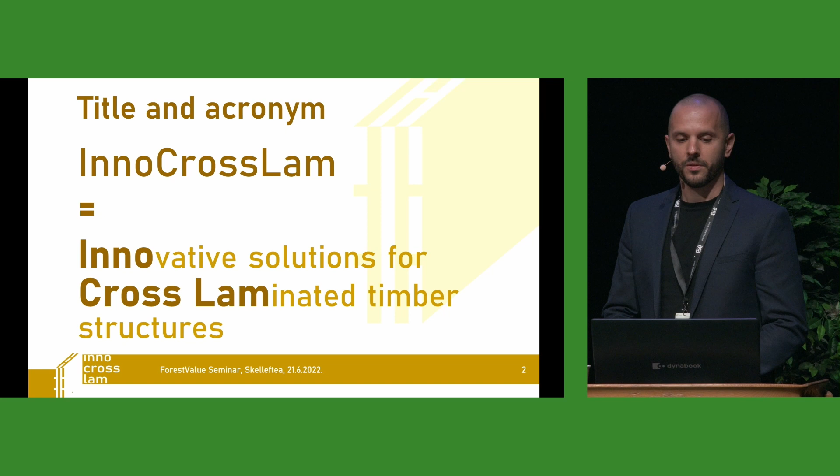As Mika said, we have an acronym, InnoCrossLam, which stands for Innovative Solutions for Cross-Laminated Timber Structures. I will just repeat our main aims: to further increase the competitiveness of CLT as a versatile engineering product by dealing with demanding design situations which are not covered by design guidelines of today or in the near future.

In parallel, we were developing a multifunctional use of CLT as an integrated part of heating and ventilation systems. So who we are?

We were five full project partners: us from Slovenia as the leading partner, then Lund University in Sweden, Vienna University of Technology in Austria, Technical University of Munich in Germany, and University of Navarra in Spain.

In addition to research partners, we have several associated partners representing industry, architects, and civil engineers. At this point, I would really like to thank and acknowledge all my co-workers.

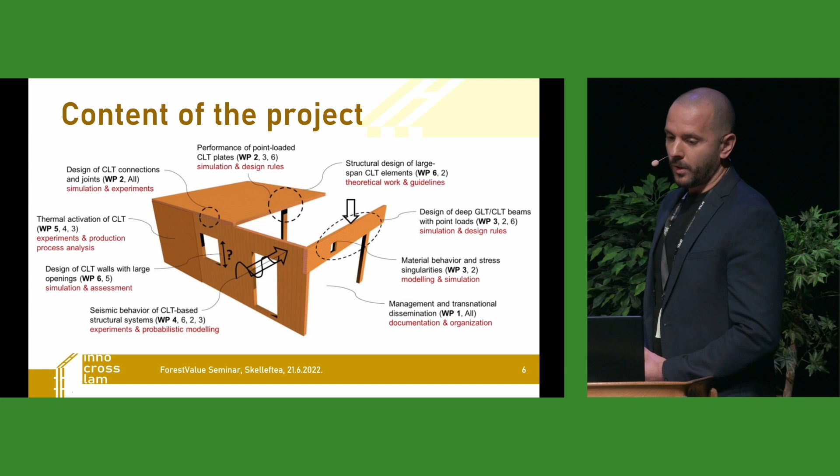And with this we were also focusing on the material behavior and stress singularities.

So I invited on stage three professors to discuss the motivation on why we applied for our project.

First it's Professor Eric Serrano from Lund University. He's the head of the Department of Construction Sciences, and he was also one of the initiators of the project.

Then Professor Philipp Dietsch from Karlsruhe Institute of Technology. He was leading a cost action from research to practice of timber structures.

And then Professor Stefan Winter from Technical University of Munich. He is the chairman of the new Eurocode 5, and was the one that directed our research, which then was helpful to be more related to practice.

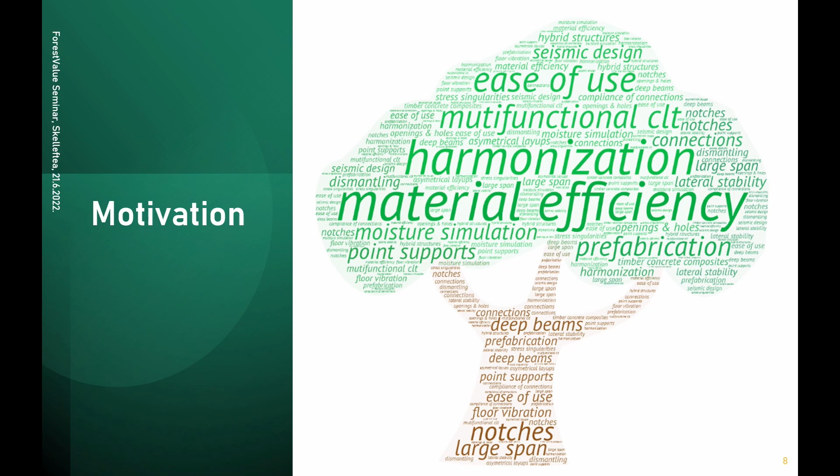Okay, so we covered many of the keywords from the tree, but still maybe the last question would cover even more. So our project received a lot of support from the industry and practice. And what is, in your opinion, the reason that we received this large support?

I see, going back or pointing back again to what has already been said, I think the 10, 15 or 20% of the design situations, I think there is a need, somehow a frustration perhaps, for the everyday practicing engineer. I would also like to highlight the ambition we had in starting with this and trying to follow through, which has of course been difficult with the pandemic situation, to involve also architects in our project to help us define or find the everyday challenges not being able to easily solve today. I think this has meant that they've felt really involved and able to contribute.

Exactly, and the main reason is that 20% of missing issues are consuming 80% of the time in the design of a project. And just as a final addition, this idea of thermally activating CLT elements, industry said, hey, cool idea, but what about this? And to answer this what about, I think they were interested in us trying to do so.

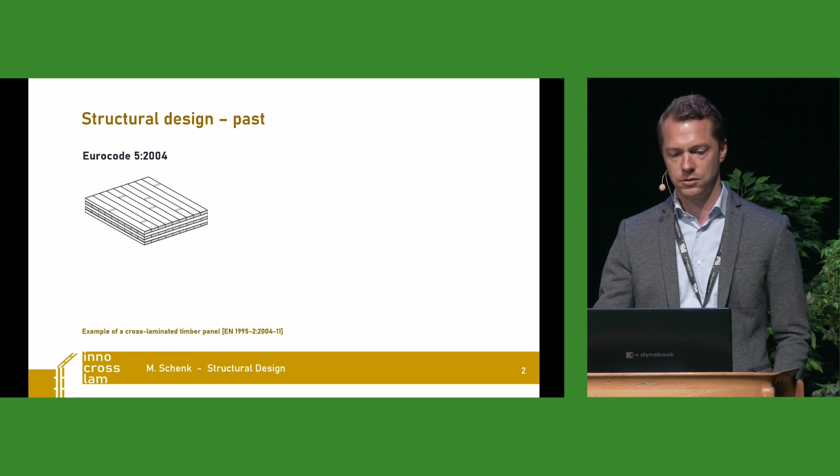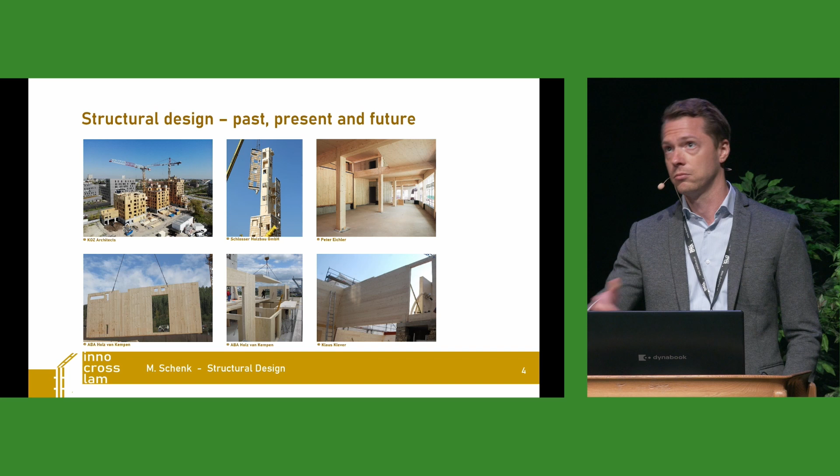The background is very clear: the relatively young material CLT barely made its way into the European design standards, the Eurocode first generation, but it will get implemented further into the second generation. For us, the question remained, is this everything we see every day on site, or as we saw the last days within this building?

To investigate that further, we started with a digital questionnaire. We distributed it in 2020 to a target group of designers, constructors, and researchers. We distributed 48 questions, and at the cutoff date we received 141 replies from participants from more than 20 countries. We received information about their experience on CLT construction, general design methods, CLT finite element software, and complex design situations like joints and connections or seismic design.

As we have seen, Eurocode 5 barely mentions CLT, and that can be seen here from this slide as well. On the left-hand side you see all the literature indicated during this survey, and in blue you see highlighted official standard documentations. The others are mainly research papers or CLT handbooks.

On the right-hand side, the picture gets more homogeneous when we look at the documentation of product parameters. Highlighted in blue you can see EN 16351, the product standard, or ETAs based on an EAD disseminated by EOTA.

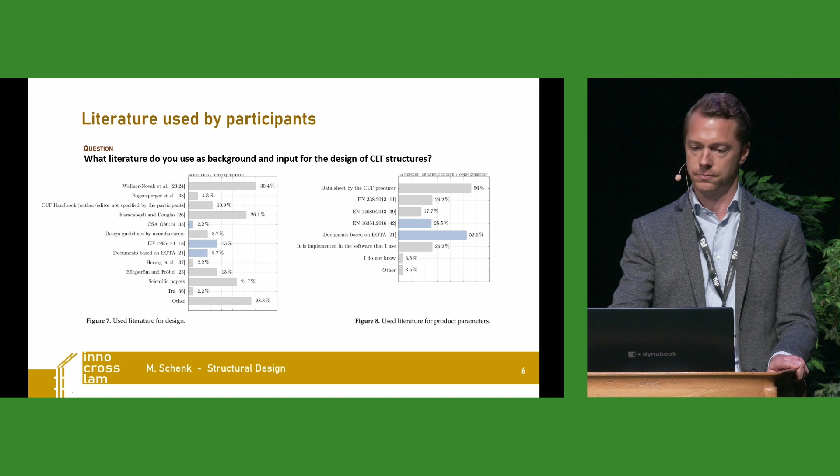But when asking our engineers, do you verify the output of your software? 20% said no. Nowadays that's quite fine, right? Our FE software is really good, and that's fine for us. No, of course not. This is a high risk of failure, as you use your autocorrect mode every day for writing messages with mobile phones, although the FE software could lead us wrong.

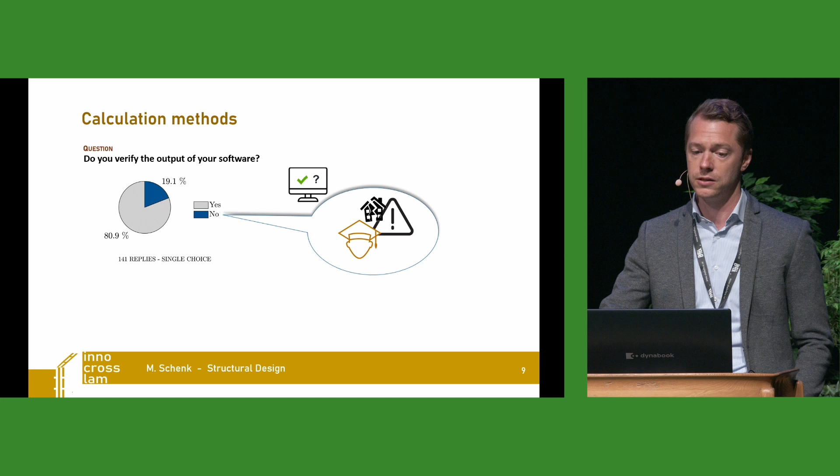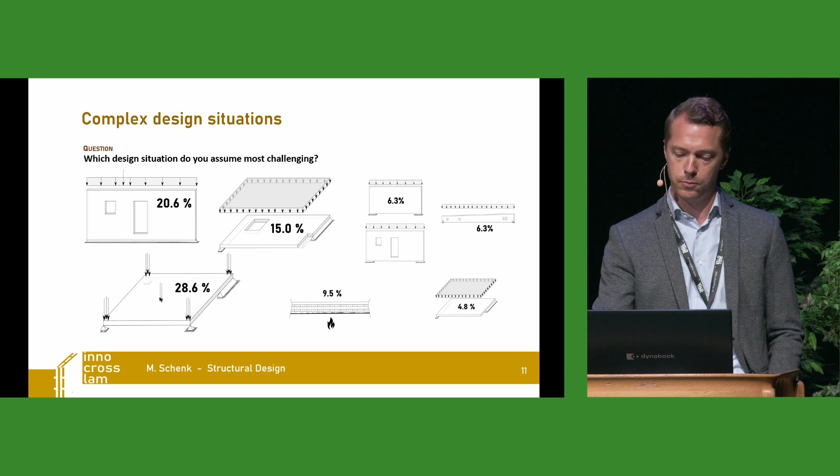The engineers very clearly stated what is the problem about these design situations: it's the missing design, missing or incomplete design concepts.

We also asked about the connections, and yesterday that question was raised during the tour in the building: how do you assume the stiffness of those connections? Most engineers apply springs. But when we asked where they get the values for those stiffnesses, the scatter of indicated literature was even wider than for the structural design.

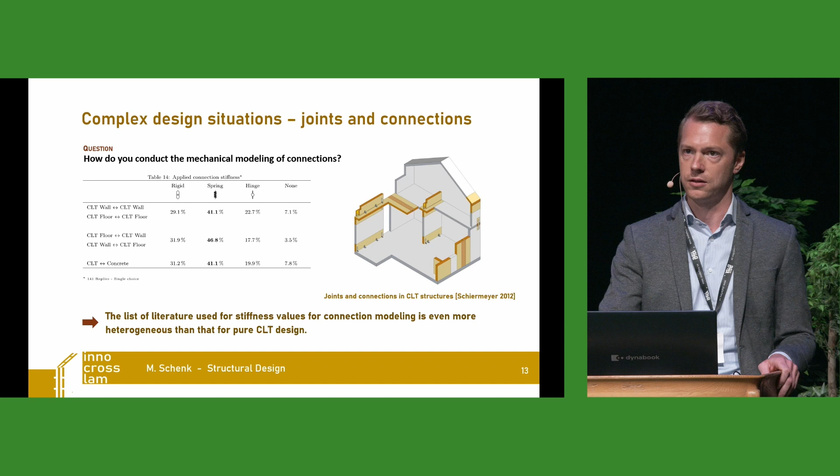Coming to seismic design, around 40-50% of our engineers have ever applied seismic design in CLT. There too, they indicated missing standard solutions as the main reason for not applying CLT further in seismically active areas.

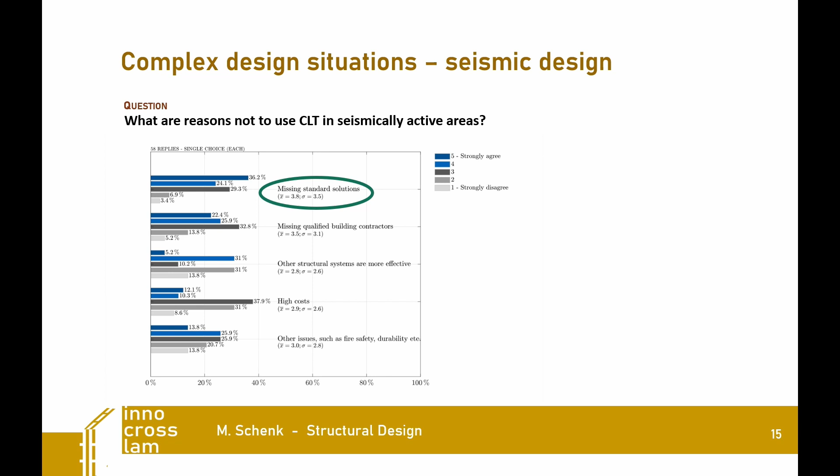That has been the digital questionnaire. In addition, we made some face-to-face interviews in times of Corona, of course online, with selected experts: 5 consulting engineers, 3 CLT manufacturers. There we asked about the preliminary design for some complex design situations, about connections, and about structural and mechanical modeling.

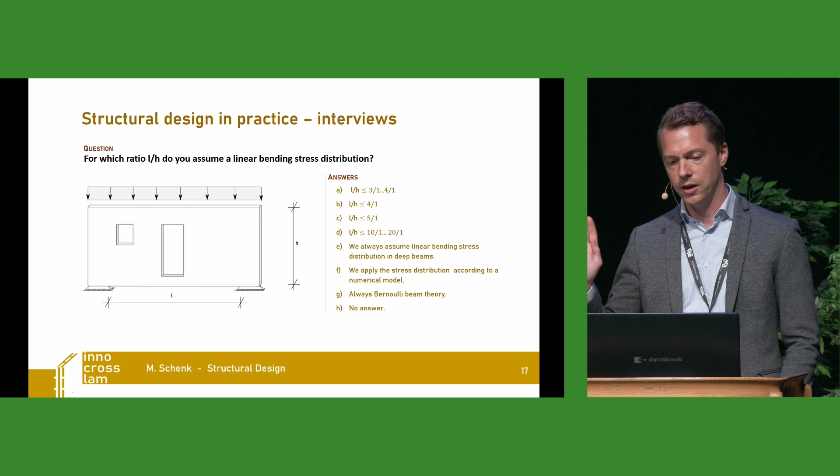You can see here one of the pictures that we showed, and we asked them one question: for which ratio L, the span, to H, the height of a wall, would you assume a linear bending stress distribution? There you can see a tendency to a value, L to H, 4:1. Other engineers apply directly the numerical methods, the FE software.

So let me draw some conclusions. There are definitely knowledge gaps with respect to some mechanical modeling, especially to the torsional stiffness of plates in bending, and the Poisson's ratio.

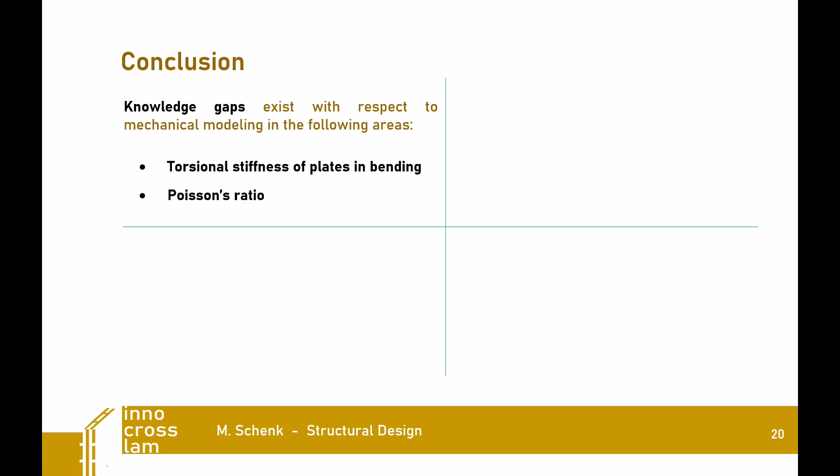The most challenging design situations for engineers in practice seem to be the point supports and concentrated loads, the openings in walls and floors, and joints and connections. Beyond the ultimate limit state, engineers identified as very problematic the vibrations, durability, and execution. Finally, given reasons for that are the missing or incomplete design guidelines and the lack of education and training.

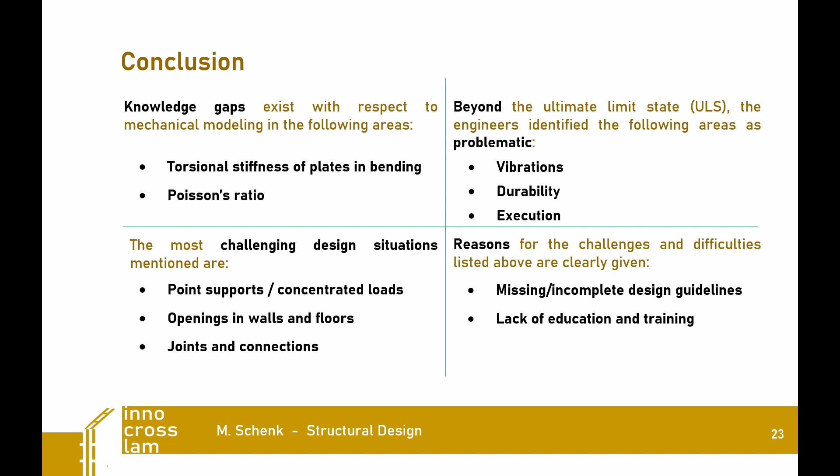That has been the kick-off for the work of all of our work packages. And now let's see how we could contribute to solve these problems.

Since José Manuel Cabrero, professor, is not able to be here, he prepared a video.

Hi, Celeste. This is Professor Cabrero from Pamplona, Spain, speaking. It's a pity I couldn't make it there, but here's my video to contribute to your wonderful meeting today.

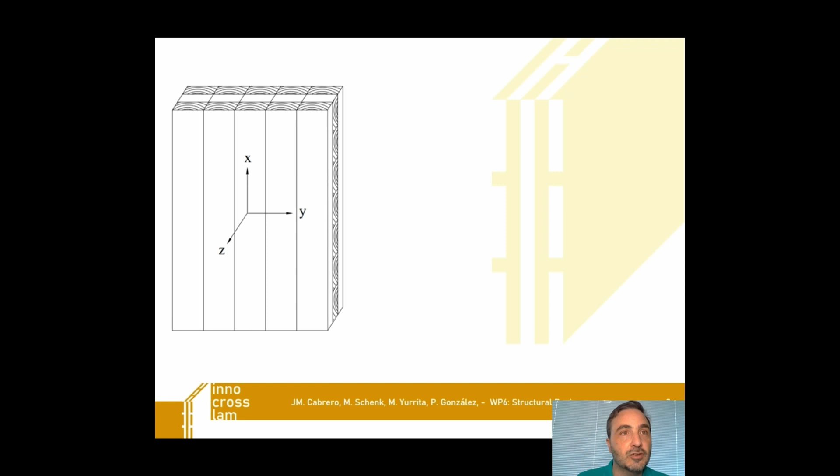As you saw in InnoCrossLam, we're talking about cross-laminated timber, comprised of perpendicular layers of timber. Timber is already a complicated material from an engineering point of view. When you add this additional complexity, you get even more complex problems. So how do people in practice deal with this? That was one of the main issues that we care about in this project.

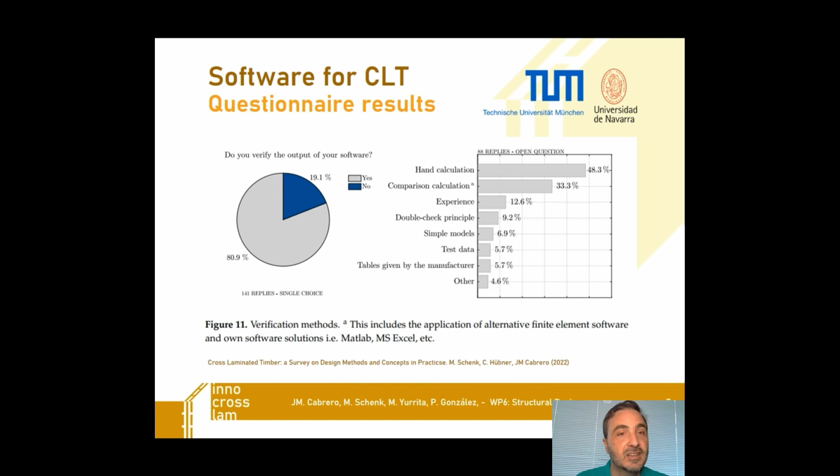Most people use either practice-oriented software or CLT-oriented software, quite dedicated solutions for this. However, when they verify their approaches, when they verify the models, they make quite a lot of use of hand calculations. So such a complicated material is dealt with eventually using very rough numbers.

When we talk about modeling in the case of CLT buildings, we are talking about modeling vertical components, walls, and horizontal components such as floors, and in both of them we have openings, and all of them are connected. So those are the main issues. There's an additional issue in the case of CLT buildings, which is that sometimes these CLT walls are responsible for the lateral stability of the building as well, so that's an additional problem to be solved by means of modeling.

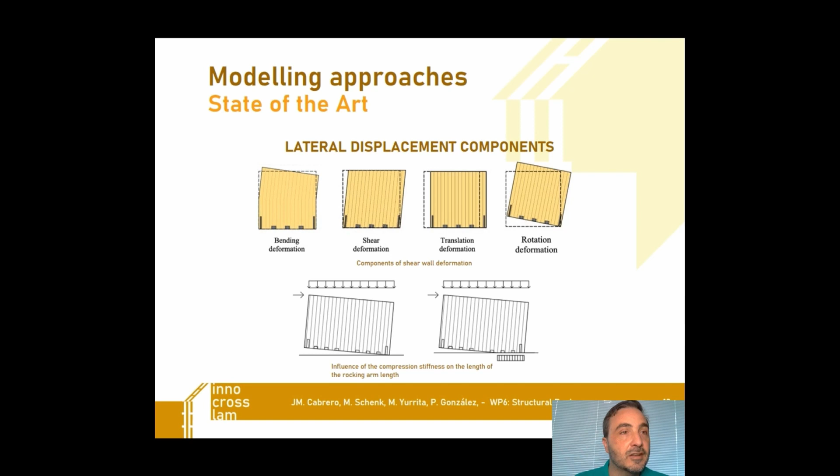How is this lateral response of the building actually? It's a complex material in which we need to take care of, on these plates, the bending response, the shear deformation, the translation, and the rotation. And as you see in the picture below, there's also a high influence on the load transfer and on the lateral response in the way we connect those panels among themselves.

When we talk about the types of models, we can go from the shell models, which are typically used, in which we model the whole geometry by means of planar elements, and we can simplify that by means of beam elements, from being quite complicated to more simple, and even at a later stage to a very simple beam model. So each model, in a way, will allow us to make different types of modeling, and those shell models are typically the ones used by practice when accomplishing the model of the whole building.

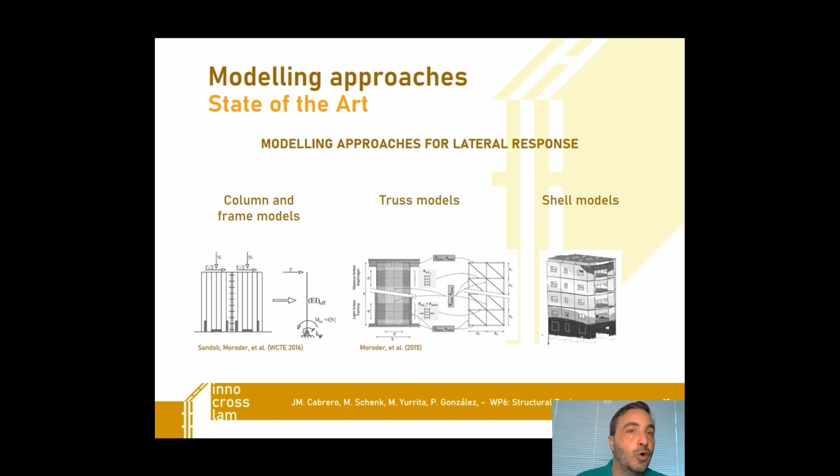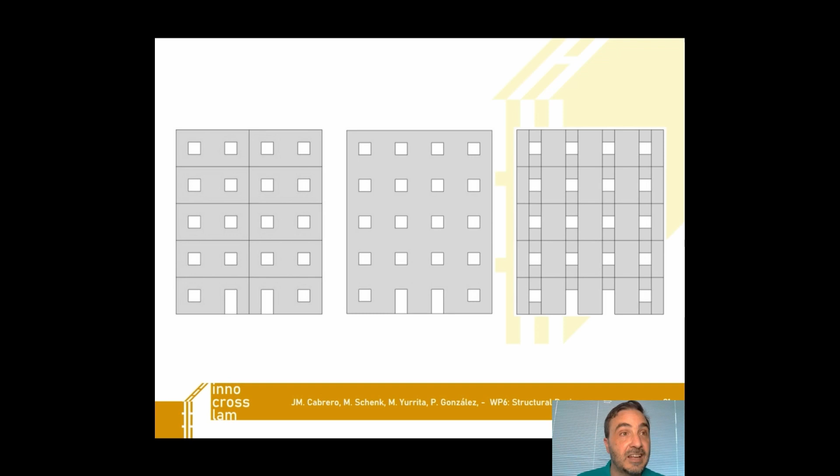But when we're talking about cross-laminated timber and having a wall like this with holes on it, with windows on it, there are different constructional approaches. We may divide the wall into these panels, or we may divide the walls in this alternative way. These two ways of building the actual wall actually have a different structural response, and we need to make sure of that. That's why we made a master thesis in collaboration with our Swedish partner from Lund. So of course there's a difference in the lateral deformation, as you see here.

The more fragmented the wall is, the more translation we may experience. But not only do we need a higher number of connections, those divisions also produce a different load transfer mechanism. As you see here, the building on the right requires a higher load capacity of the connection in the corner than does the building on the left.

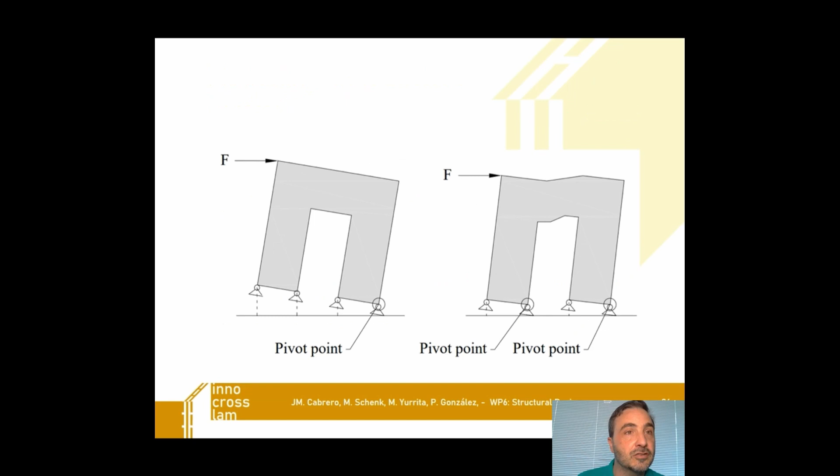So the constructional approach has a lot to do with the structural response and the structural demand. It's sometimes a problem of divisions. Divisions have to do with the number of connections we use, and the number and location of connections strongly affect the response of the building. In the case of CLT buildings, there are many connections, so connections are a key issue when modeling CLT buildings.

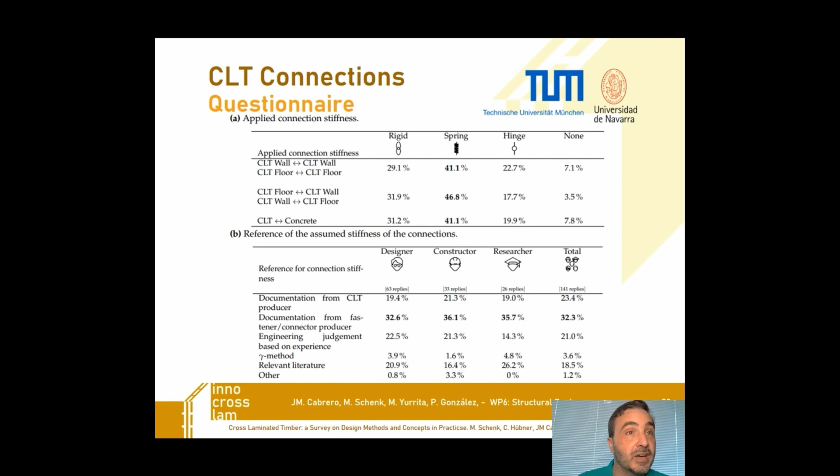This gives rise to the problem that practitioners already saw. They saw that there was a huge potential for improvement in connection design, and that there were many issues they were not solving. That's why we made such a detailed approach.

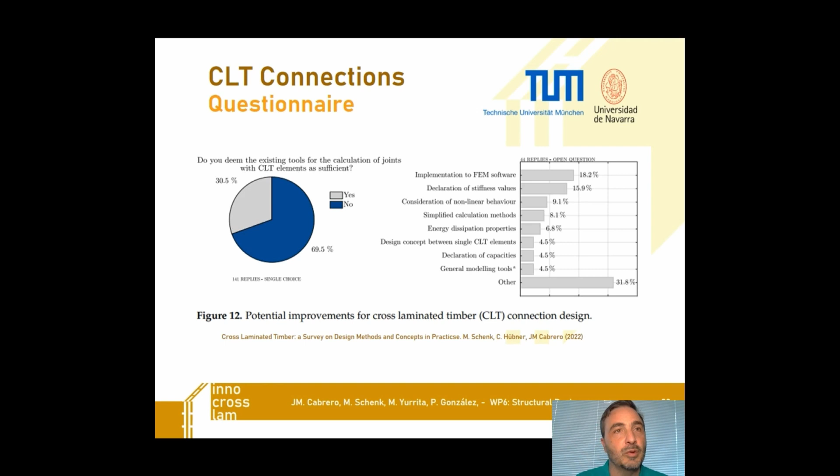The main conclusion was that you could use simple pin connections as a simplification when you're not relying on the CLT system itself for lateral support, or when the lateral loads are not big. Of course, this is not the right way to model the building when dealing with strong winds or seismic design.

In conclusion, when modeling CLT buildings, you need to make some very early design decisions that will influence your model. You need to decide which type of construction you're going to make, either balloon or platform frame-like construction, how you're going to divide the wall, how you're going to divide and produce those holes, how you're going to connect them, and how you're going to deal with the openings. All these are essential key points you need to take into account in your model as soon as possible.

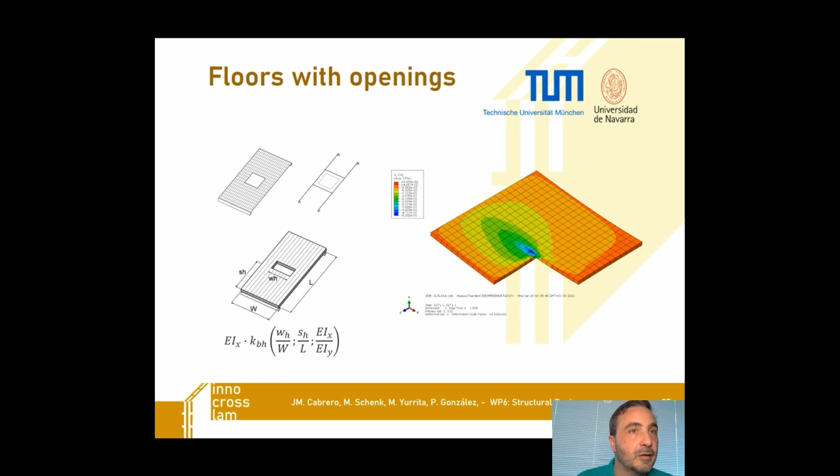When we worked on these very detailed models of the building, we found some modeling problems already, some numerical problems, as you see here, some stress concentration issues, also when modeling holes in the walls or in the slabs. That's why we made some tests on holes, in order to have a real picture of what's going on in a real CLT plate with holes.

Hopefully some of the answers will come in the next presentations, because we dealt not only with these stress concentration problems, but also with what happens with point support loads, which also produce stress concentrations, and especially what happens with moisture transfer, which was a very delicate matter in our case, trying to make use of this multifunctional CLT plate that you will see in the following presentations.

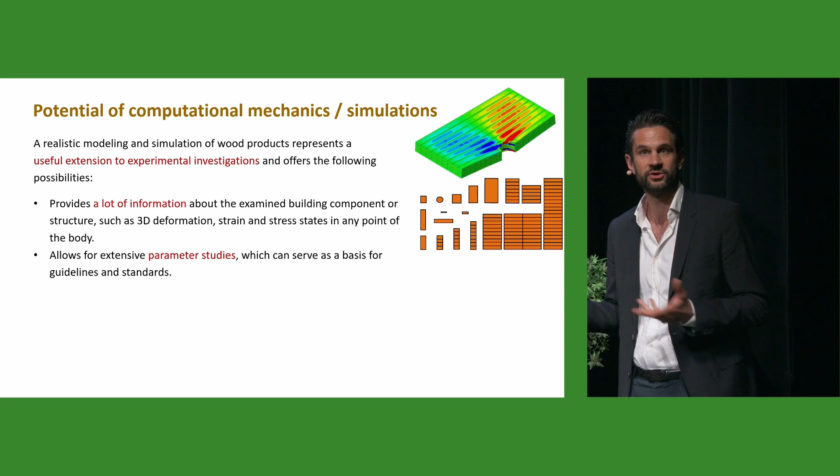And this comprehensive information is required to set up guidelines, standards, and design rules for Eurocodes.

Third, it makes certain investigations possible, especially ones where you have very large building components like 3-meter glulam beams, which are not uncommon or will not be uncommon in the future. Or when you have extremely long loading times, like a moisture loading over several years. That's possible with simulations, and normally you then also have a lower cost compared to equivalent experimental tests.

However, for all of you who do experiments, they will always be required for validation purposes, and we believe that both need to exist in parallel, and then we have the best effect to boost timber structures. So let's give you a couple of examples.

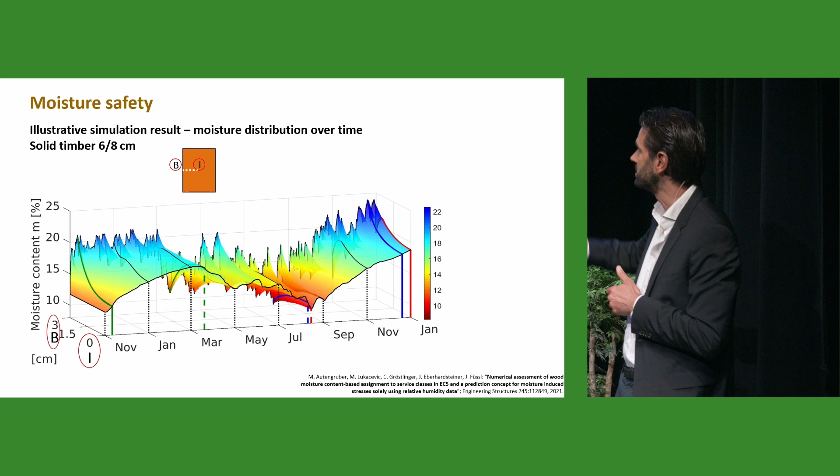I will start with moisture safety, because that's an increasingly important topic. Here you can see, for example, such a result from a numerical simulation: the moisture distribution along a path from the surface point to the interior of a cross-section over a couple of months. You see the fluctuations of the moisture content at the surface point and in the interior. It looks different for a GLT cross-section, and it looks different for a CLT.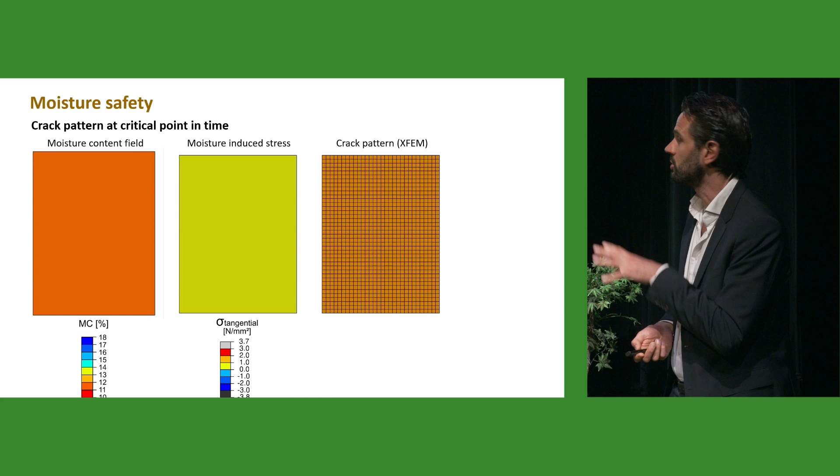But just so you can see, you get a lot of information - the moisture content at each point in time too. So it's quite efficient to do such simulations. You can also couple these moisture simulations with mechanical simulations, as you can see here, and on the right side coupled with an extended finite element simulation where you can even predict the crack depth induced by moisture loading.

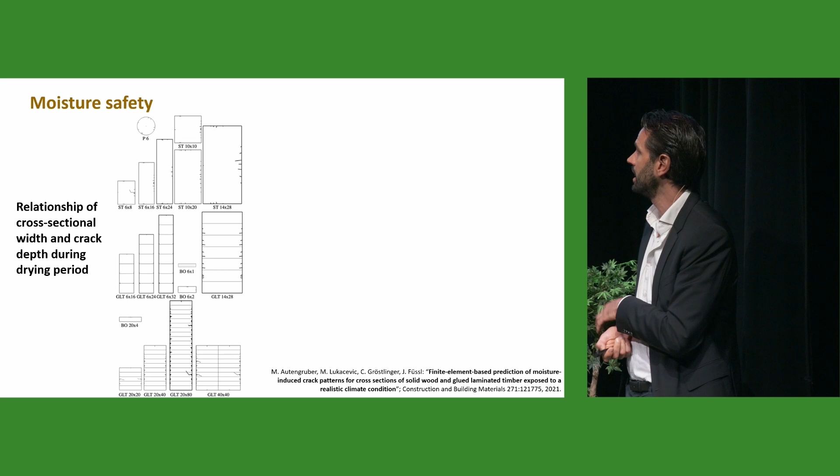We have done this for different cross sections, determined the crack depth, and compared the resulting values with assumptions from the Eurocode, for example. So you can use this huge amount of information to check whether your assumptions, design rules, and guidelines in certain codes are on the conservative side or not, or whether they need to be improved. In this case, there are actually quite good assumptions in Eurocode 5 with respect to crack depth.

We've also looked at timber concrete composite floor systems. How large does the moisture content concentration in certain points become? Are they critical or not? But more importantly, under normal indoor climate, how fast do they decrease? And they decrease quite quickly, so they shouldn't become a problem.

However, sealing of these end grain surfaces can significantly improve the moisture behavior.

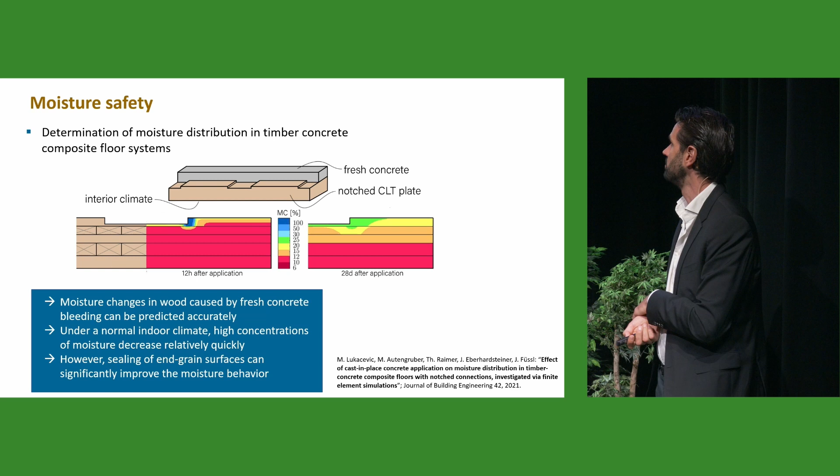And finally, with respect to moisture, we have simulated such CLT experiments. They were put into water by a partner university, TalTech. Here on the right side, you can see the data of 4 measurement points - in red, the average values, and in blue, the simulated ones. With a little bit of calibration, not too much, we can see that we can reproduce the experimental data quite well.

Which is great, because now we have the possibility to actually investigate different cases which can arise, which are probably seen critically by engineers in the timber industry or other industries, like the concrete industry. If someone tells you that's critical, that's not possible to do in CLT, you can run a simulation and say, no, please prove me wrong, but we believe that's possible, for example. So that's the reason why we're doing this.

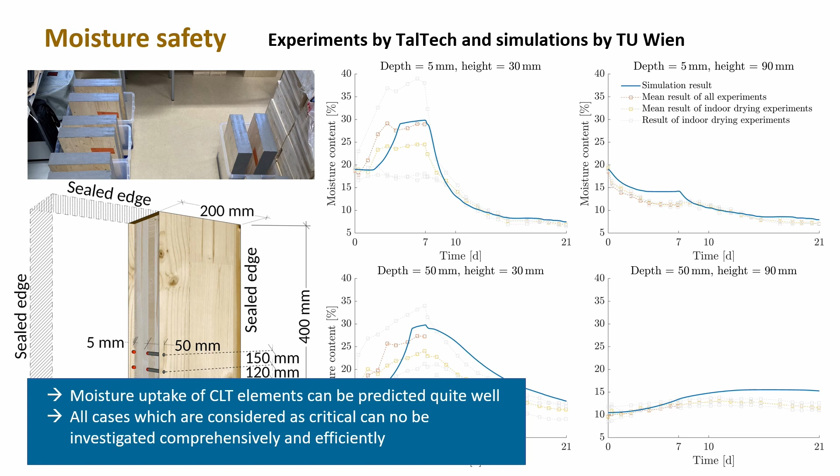And now I will give the floor to my colleague Markus, and he will show you another 4 examples.

Yes, so another question we try to look at is how to handle stress singularities and material variability caused by knots and fiber deviations. We invested quite a lot into the ability to realistically model failure mechanisms in such sections of wooden boards with knots. And we could show that by using very advanced methods like this phase field approach, you're actually able to simulate such very detailed fracture mechanics effects.

So the idea is, in the future, to use such very detailed simulations to, for example, get more detailed effective properties for such sections of knots. Then you can get effective strength and effective fracture energy properties.

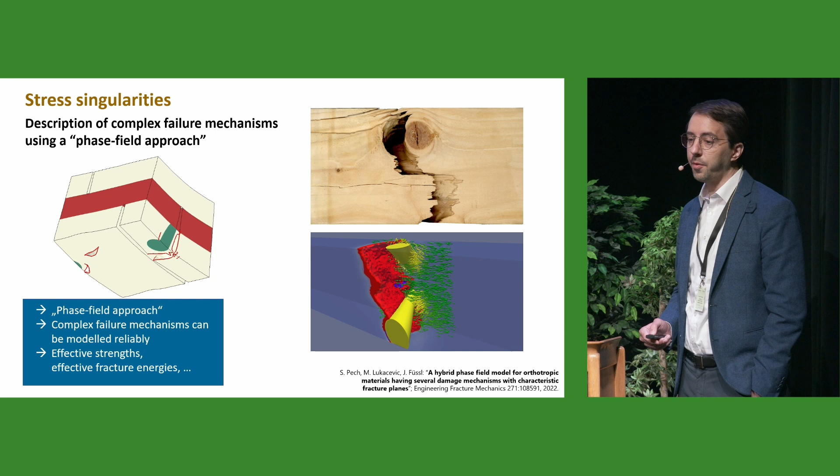Once you have such properties, you can use them in the simulation of glued laminated timber beams. In such a beam, you can divide the lamellas into sections with clear wood and knot sections, each with a different effective material property. We could show that using this approach, you can not just predict the load-bearing capacity quite realistically, but also the global failure mechanism.

And this works not just for 4 lamellas, but for 10 lamellas. Quite recently, we are doing a large set of simulations with up to 100 lamellas, where we studied the size effect regarding bending strength of glulam beams.

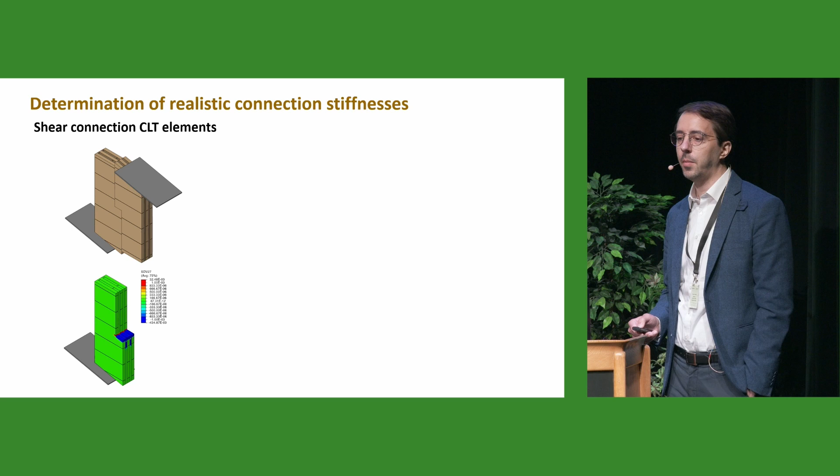Another task of ours was simulation of structural details, for example answering the question of how you can consider the stiffness of connections more realistically. So here again we use detailed nonlinear finite element simulations, for example of this shear connection of CLT elements, and then in the next step of such CLT floor-wall connections. But not just running these simulations, we also try to derive more simplified spring models, which in the next step can be used in engineering software.

Just some other examples of our research within this project: simulation of such point-supported CLT elements, where we are also able to predict all possible failure mechanisms realistically. Once you have such a model, you can easily perform parameter studies with different dimensions, ratios, and loading combinations—something which is not too easy if you do it by experiments, since they're too expensive and you need extensive programs.

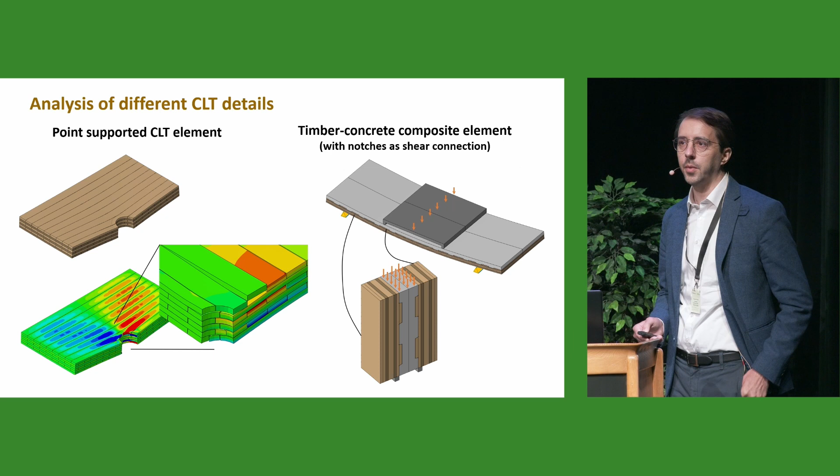On the right-hand side, you see another example of a timber concrete composite element, here with notches as shear connections. And here we could show something which was tried with experiments: it's not too easy to predict this load-bearing capacity with small-scale specimens, because we saw in our simulations that the load transfer mechanisms and also failure mechanisms were quite different. That's something you can study in detail with such simulations.

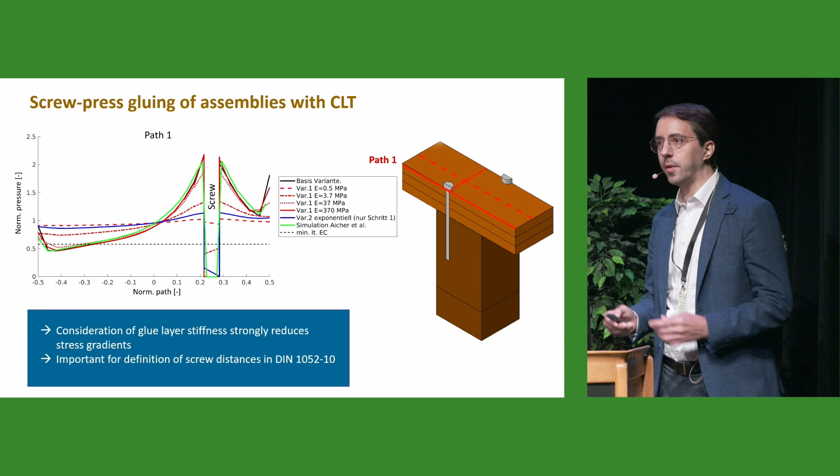As a very last example, I want to show you simulations of screw press gluing of, in this case, a CLT and a GLT member. Here you can see that if you consider the stiffness of the glue itself, you can reduce the stress gradients right next to the screw, which is maybe more realistic and which you can also experience in experiments. With this result, I think we could add a little bit to the ongoing discussion of what is the necessary distance of such screws in actual timber codes.

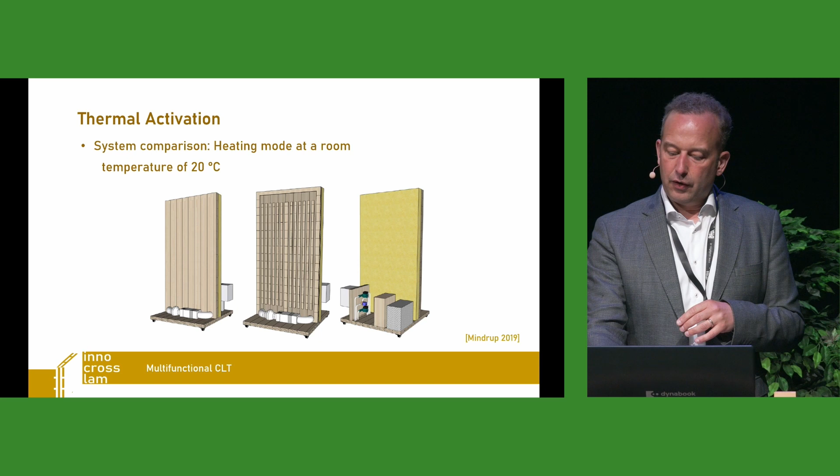Seven years ago, our former colleague Klaus Mindrup made the proof of concept. He would circulate conditioned air, warm or cold, in the CLT element. Of course, circulating water would be more efficient, but water and wood has some difficulties, and this would involve placing tubes in the natural material, which is wood. Not only by simulations but also by experiments, Klaus Mindrup could prove that when you use the second outermost layer of a CLT element, you would receive competitive results with respect to specific heat output of such an element when compared to the standard surface applications that are on the market today.

The first idea did not work—that was obviously to thermally activate the center layer of this product. I can imagine you seeing this idea maybe for the first time, and you have many questions: yes, but what if, what about? The main objective in this work package was to answer the most important of these questions, and this was the task of Matthias Arnold. So please, Matthias, could you introduce us to some of those important questions that had to be answered? Thank you, Philip.

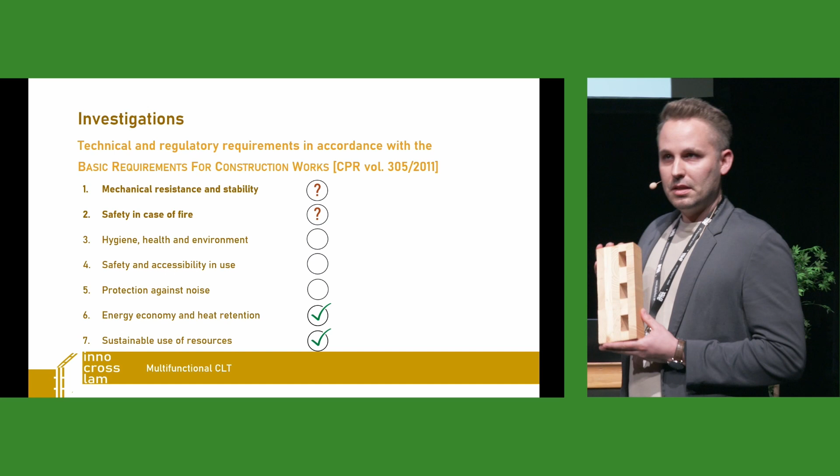So the 7 essential requirements for construction products are giving us the questions to be answered. If we look at this small sample of multifunctional CLT, it becomes obvious that the cavities are influencing the mechanical properties, and the asymmetric layup may cause an overall deformation behavior, leading to an overall curvature in the element due to the asymmetric moisture profile over the cross-section.

Also, we have to think about the safety in case of fire. What if inside the channels a cavity fire is burning? How can we extinguish it, and how does it influence the overall fire resistance?

Okay, so now we know the questions, but could you introduce us a little bit more to the product? How could this product actually look like?

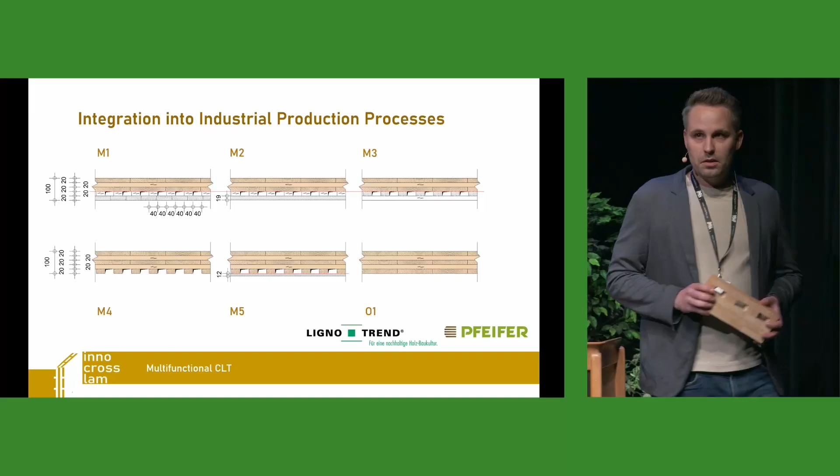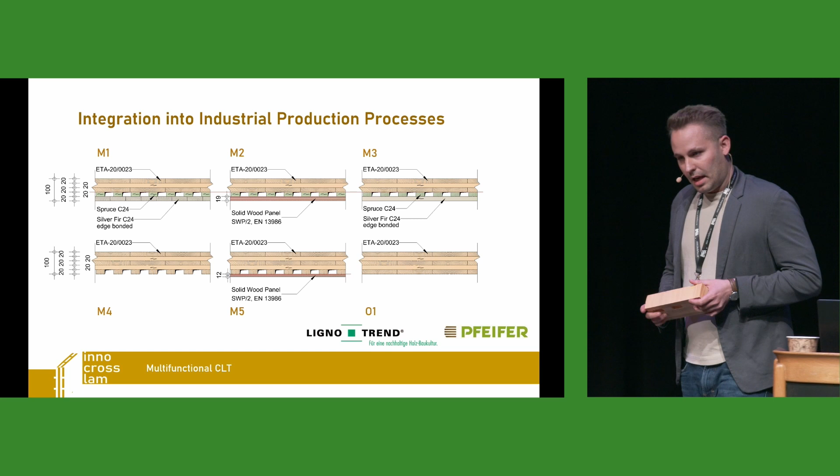For our investigations, we were able to produce and develop 5 different series of multifunctional CLT. Here you can see the basic CLT elements, which were produced by Pfeifer Timber GmbH. Adding to these elements, Lignotrend, a German company, was able to add the functional layers and the airtight front layer to the non-edge glued basic CLT elements.

Okay, these are nice drawings, but were our partners actually able to produce this on an industrial scale? Yeah, due to the high number of test series we needed for our investigations, we were worried to find a partner able to produce this on industrial scale. But Lignotrend, in the past and currently, is always producing mass timber elements featuring channels, so they were able to produce it and integrate it within their standardized production processes without problems.

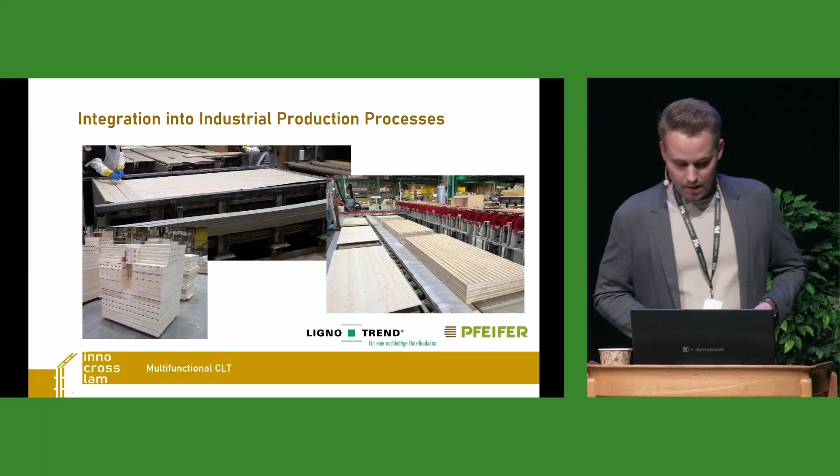Okay, which means we could come back to the questions characterizing that material, starting with essential requirement number 1, which is the mechanical properties. What kind of questions did you have to answer in that aspect?

When it comes to mechanical resistance and stability, we try to investigate as many stiffness and strength properties as possible. We started with the determination of the compression strength and stiffness, and this led us to the determination of the buckling loads, for example.

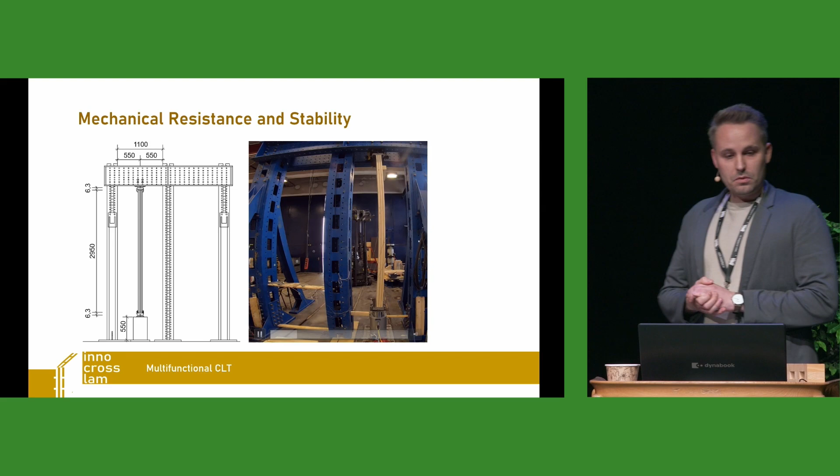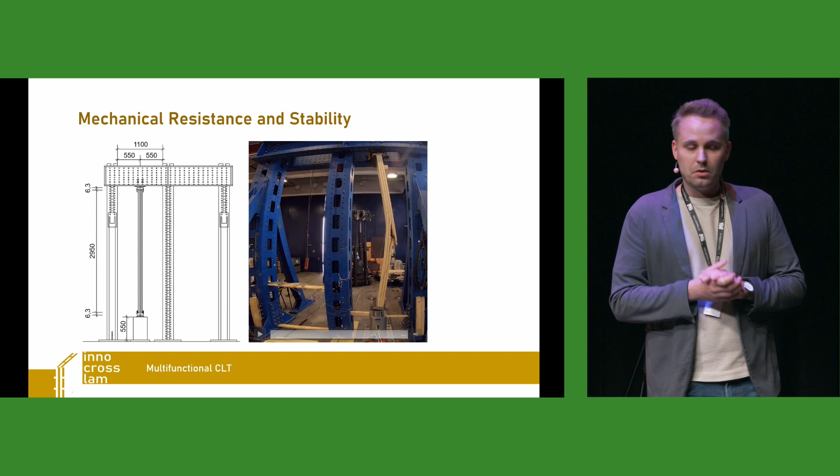I will show you a short clip of the investigations of these wall elements with 3 meters of length. Now we hear the cracking, and here's the quite brittle failure for the multifunctional CLT series. Per meter wall length, up to 0.7 meganewton were achieved, in reference to the standard 5-layered CLT non-edge glued, which was 1 meganewton. So it was a bit less, but overall quite good results.

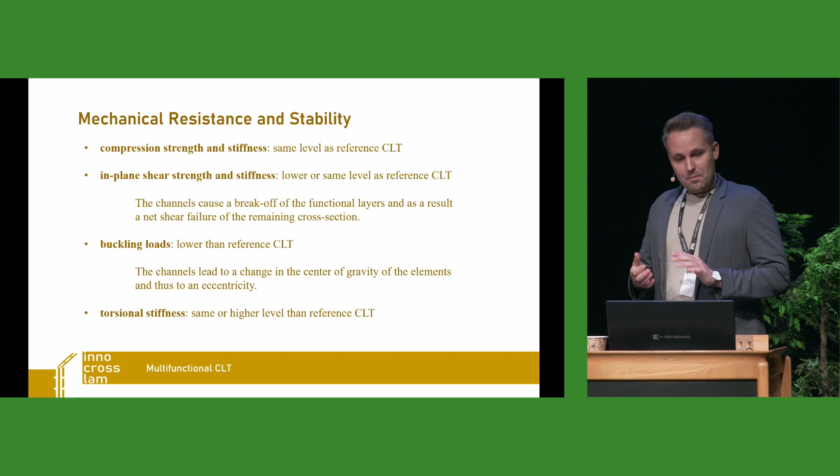But to answer your question, back to multifunctional CLT: the compression strength and stiffness are at the same level, but what is really lower is the in-plane shear strength and stiffness and the buckling loads.

Okay, so that means we do have now values for the load-bearing function, but we know now we want to circulate cold or warm air in this element, and warm air will withdraw moisture from the timber element. What kind of influence does this have on your wall elements?

Yeah, like you introduced, during the heating and cooling processes, temperatures between 15 and 45 degrees occur in the channels, which of course leads to an asymmetric moisture profile over the cross-section, which is always switching from side to side due to the heating or cooling mode you're in.

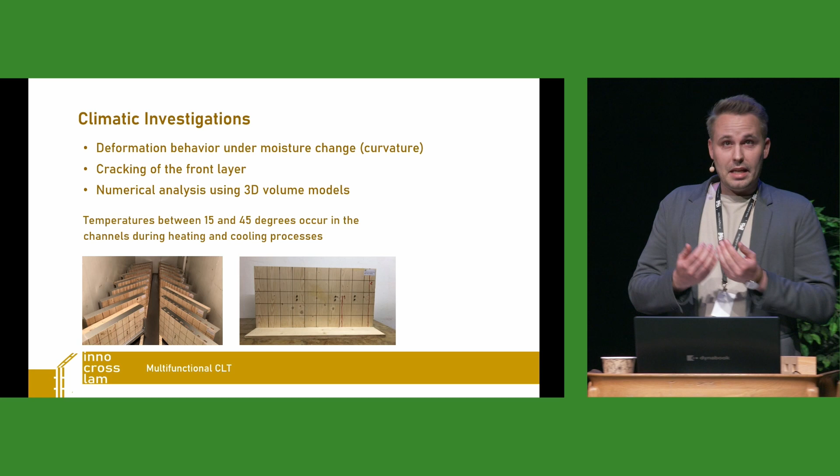And so we figured out the deformation behavior, and we put 4 specimens of each series into a climate chamber in order to investigate the overall curvature.

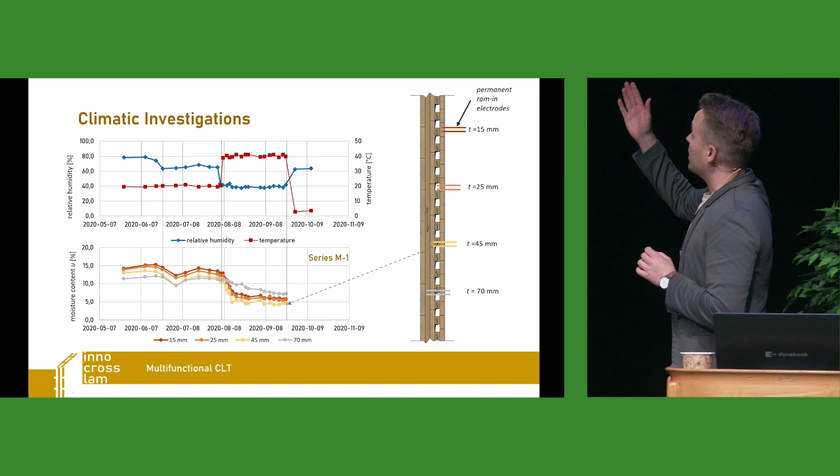You can see at the beginning of the heating period, on the 8th of August 2020, there was a clear switch in the moisture profile, and this led to a switch of the overall curvature, which we measured by a measuring bar, which you can also see on the right side.

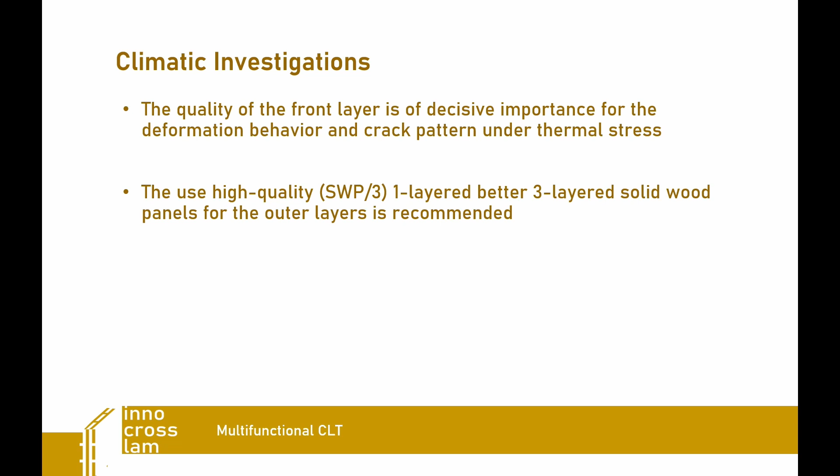So what have we learned? It is really important to use high quality solid wood panels for the front layer, which leads to a lower risk of cracking due to maybe constrained deformation in the assembly.

The most mentioned challenge by the colleagues we talked to was actually essential requirement number 2, safety in case of fire. That was a big question to be answered. Could you introduce us to some of the items you had to cover?

Safety in case of fire was a main issue we had to figure out, how the fire resistance is influenced. So we tried to cover as many investigations as possible with our fire testing. We measured time temperature curves, the mass burning rate, and the fire protection closure. We also tried to figure out what is happening in case of a cavity fire.

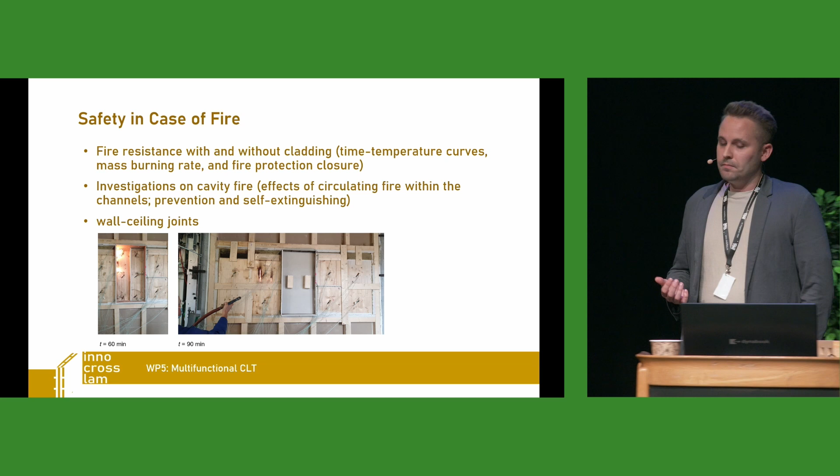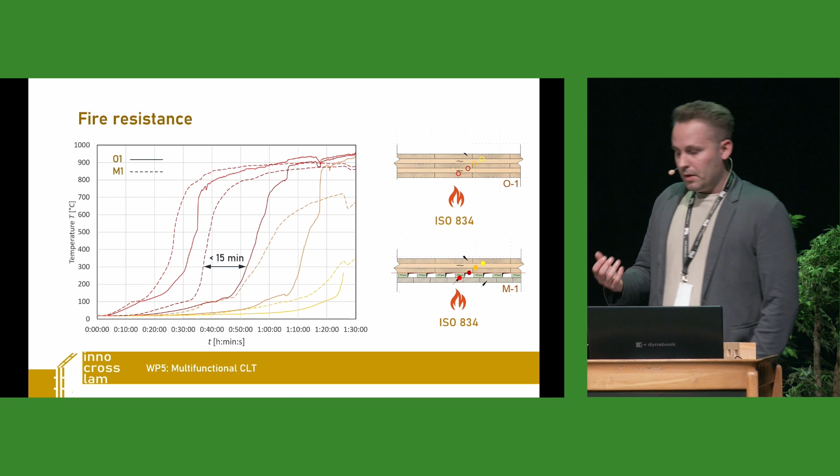Can you tell us about the influence of the cavities on the resistance? What we see here is the well-known time temperature curves behind each layer, measured on a standard 5-layered CLT element, non-edge glued, following the ISO 834 standard fire curve. If we compare it to a multifunctional series, we see a clear reduction within the channels by 15 minutes of overall fire resistance due to the faster burning rate.

A second possibility is fire inside the cavities. What kind of effect would this have? Let's remove the 01 series.

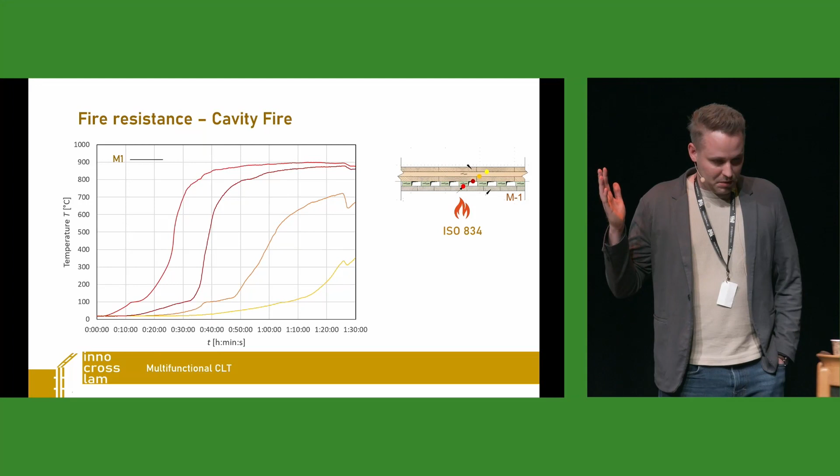Now these are the time temperature curves for the multifunctional series, with the fire event inside the room, and we add a specimen with cavity fire. We took the specimen and set it inwards into the oven to guarantee a burn-in and then circulating cavity fire in the elements. We see we are losing 10 more minutes of overall fire resistance. We also investigated chimney effects, but to make a clear statement, it's a reduction of 10 more minutes of fire resistance.

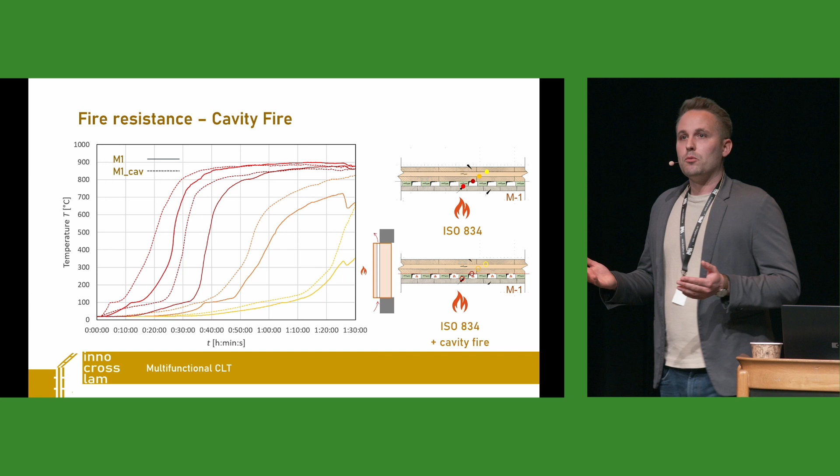So for me this means we can produce this product on an industrial scale. We do have numbers for mechanical resistance and some results on fire resistance. Which questions do we still need to answer, or which steps do we still need to take to really make this product ready for the market?

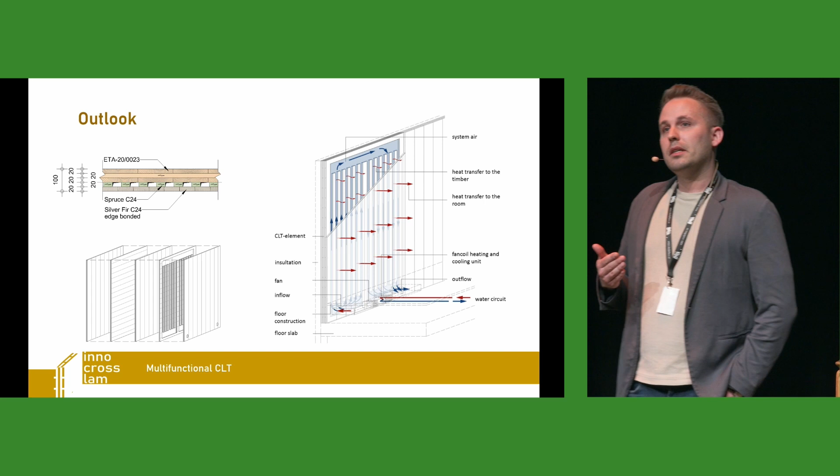First of all, we have to extend the EAD towards CLT featuring cavities, for example, and also towards elements featuring diagonal layer arrangement and things like this. The next step, what we are currently working on, is to get the requirement done for sound insulation, how the sound insulation is influenced by the cavities. So this is what we are working on right now, and also we are working on a catalog of applicable connection techniques.

Thank you very much, Matthias. You're welcome.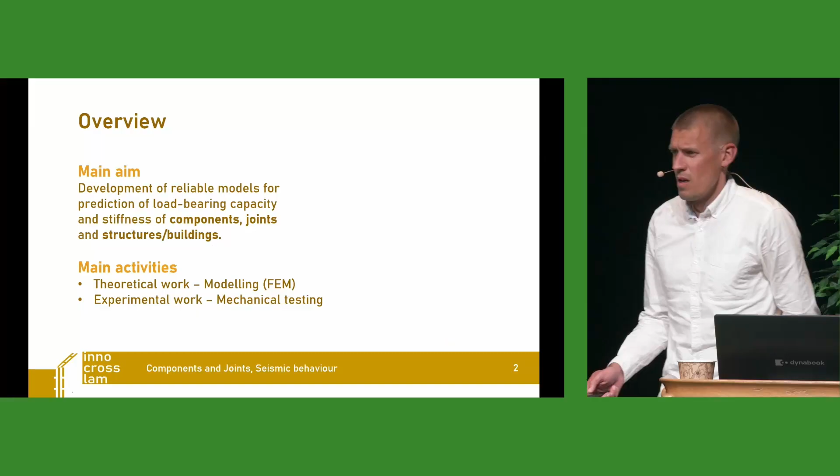My name is Henrik Danielsson, I'm from Lund University, and I will talk a little bit about the work packages dealing with components and joints and the seismic behavior. The overview of these work packages and a lot of other parts of our project can be summarized with the main aim being development of reliable models for prediction of load-bearing capacity and stiffness of components, joints, and also structures or buildings. The activities presented relate to theoretical work, mostly modeling using the finite element method, and also some experimental work, mechanical testing. We'll give a few examples during this part of the presentation.

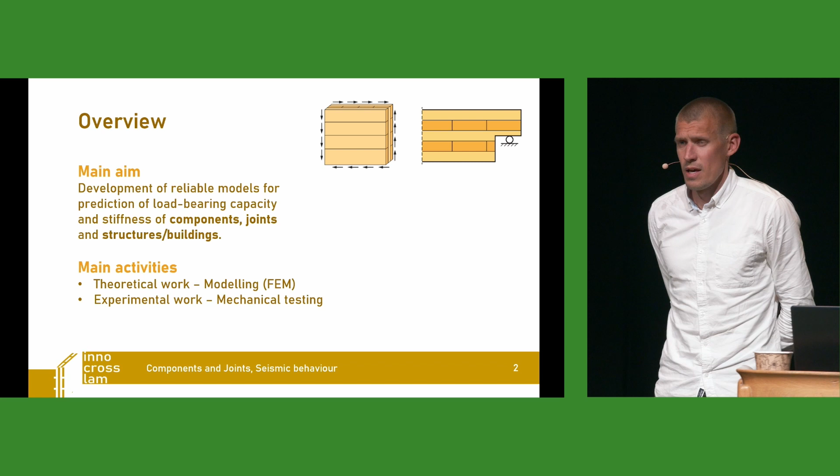First about in-plane shear loading, notches in CLT, and as you see here below, Boris will then mention something about connections, and finally something about the seismic design.

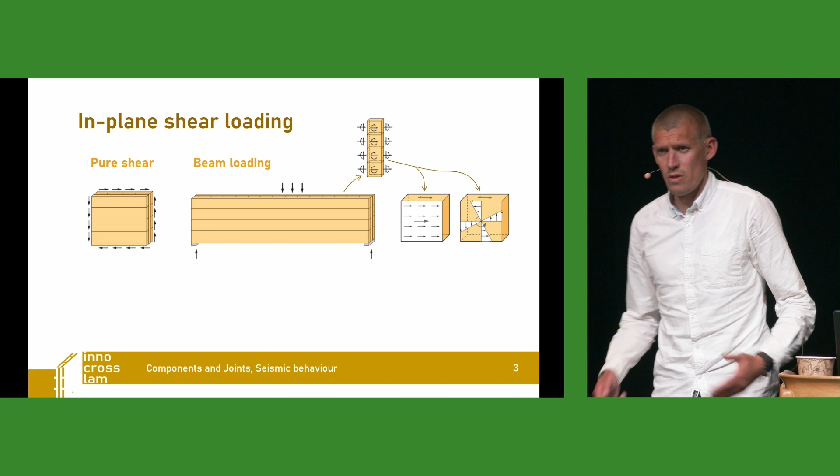Starting with in-plane shear loading, this can be either pure in-plane shear loading or beam loading conditions. For these load cases, we could have several different failure modes, and we have mostly focused on the failure mode in the crossing areas between the laminations of different layers, where we can have relative translation and relative rotation between the laminations. Our work here has consisted of development of a consistent or uniform design approach for both these cases, and we've conducted experimental tests, which I'll show in the next slides.

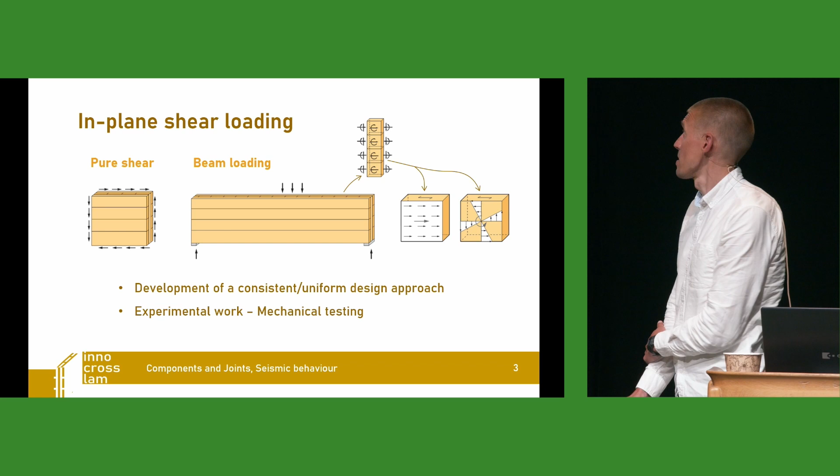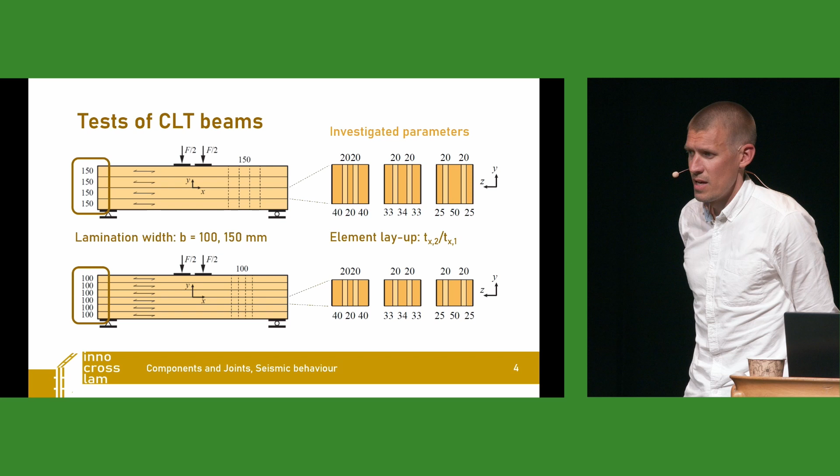The tests were carried out at the laboratory in Zag in Slovenia, and we studied basically two parameters. Since all beams had the same gross cross-section area, we studied the influence of different lamination widths, 100 millimeters and 150 millimeters. For both these lamination widths, we tested different element layups in terms of the ratio between the external and internal longitudinal layers.

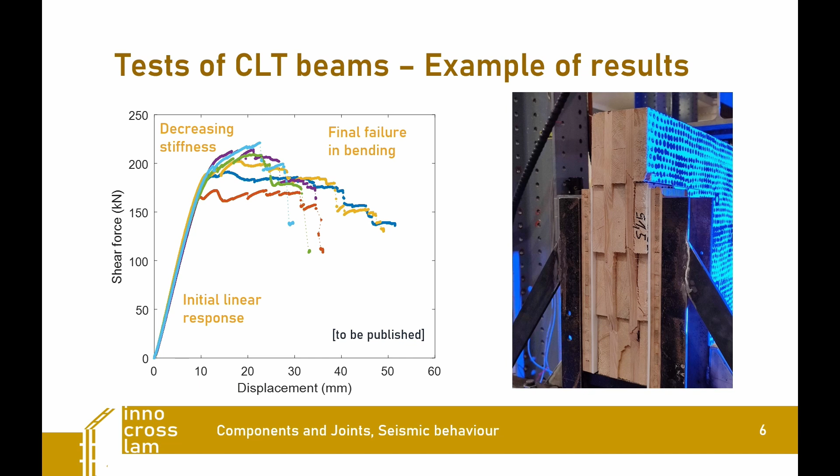This is just a picture of the end face of the beam, where you can see this fracture over the crossing areas between the laminations.

Next topic is notches in CLT. Notches like this, a geometric discontinuity, introduce large perpendicular to grain and shear stresses, and it may lead to crack initiation and propagation, and is typically related to a significant reduction of the load-bearing capacity.

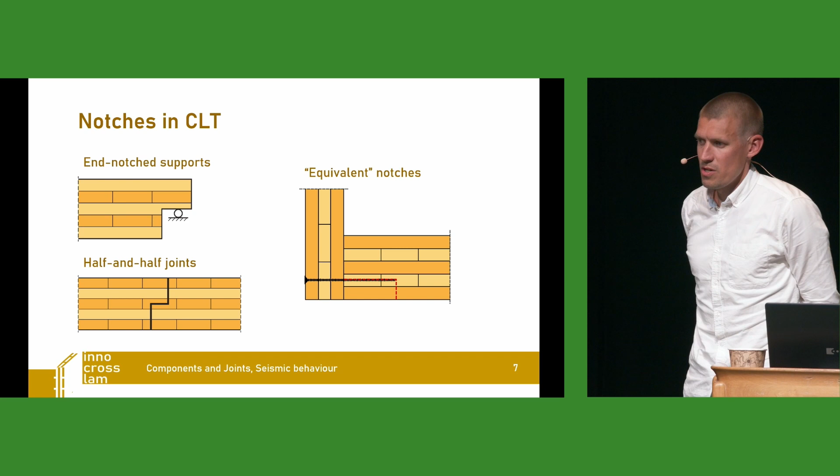In terms of modeling, we've studied some approaches based on fracture mechanics. As Erik mentioned previously, this has been a lot of his work, and we've studied a number of different approaches based on fracture mechanics. The first could be an analytical model based on beam theory, giving a closed-form expression for the crack load. This approach is similar or consistent with the Eurocode 5 approach presented a long time ago by Professor Per-Johan Gustafsson, which is now included in Eurocode 5 for timber and glulam beams, but could be applied in a fairly consistent manner also for CLT.

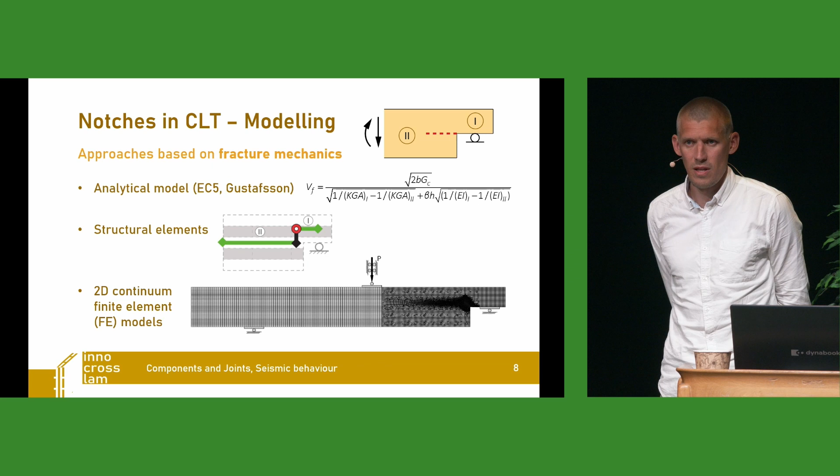We also studied structural elements and some different approaches using 2D continuum finite elements. We've conducted a number of tests on CLT plates, or actually more narrow CLT beams with notches at the supports. We've studied a number of different geometry parameters: the beam orientation, the notch length, and the notch height, since the height of the notch and especially the placement of the notch corner with respect to the different layers influence the load-bearing capacity.

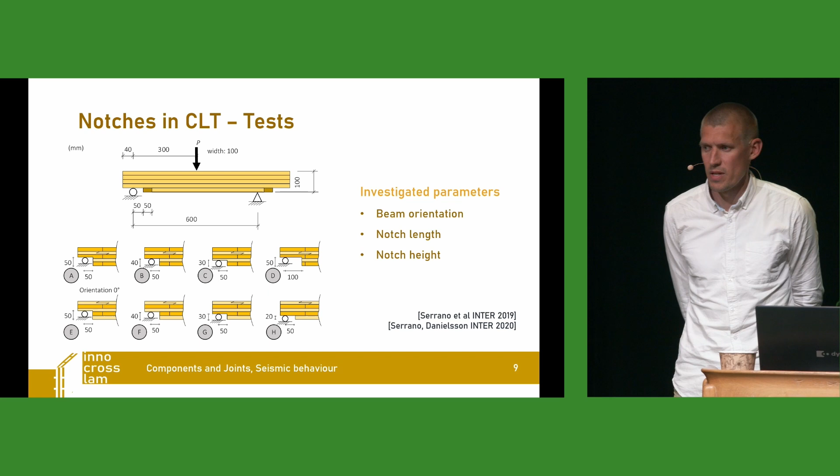So with that, I'll leave the floor to Boris again.

I am sure that most of you had a walk yesterday and a tour around the Sara building. With this high-rise building, such as Sara, we also get a high capacity demand of structural connections. In our project, we were interested in whether these high load-bearing connections cause local failure of the CLT as a durable material itself.

We could see that although we have the cross-layered layers, we could still reach this brittle failure of CLT.

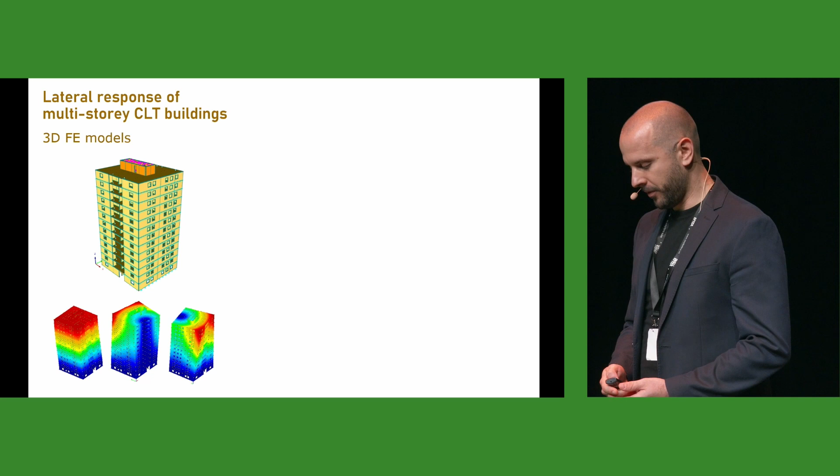Especially here for high-rise buildings, we focused on the nonlinear response and proposed a simple model, which we could then use in earthquake regions and for high-rise buildings to assess and have a more exact result.

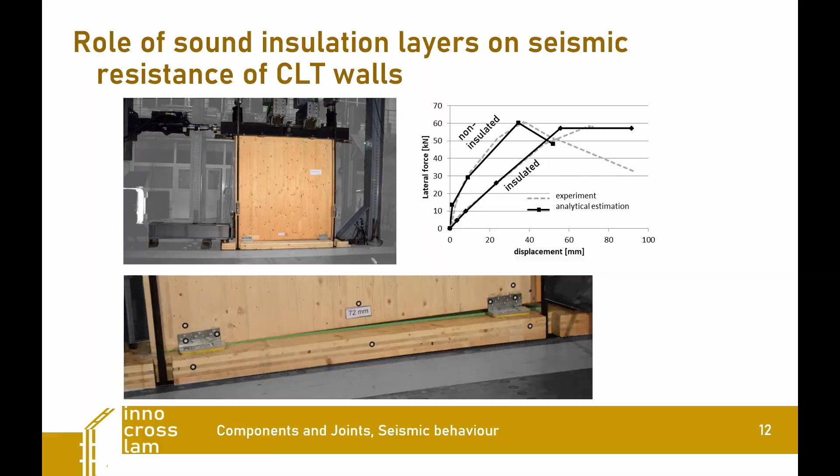And how did we calibrate, or how did we validate these numerical models? First, by performing tests. In this special case, we had tests on CLT walls with insulation bedding and without the insulation bedding. The result was that we reached a much lower stiffness with the sound insulated CLT walls, but we have a comparable load-bearing capacity. So we used this experimental data to calibrate our models and to have a more exact result.

So with this, I will conclude my presentation and move on to our last part.

My mic stopped working, okay.

I would like to invite our associate partners on stage. But first, we have a question for you. In this next panel, we will discuss what you think are the most important topics for future research with CLT. Please take your phones and use the Mentimeter to tell us what you think we should do in the future, related to the topics we already covered or ones you feel are most appropriate, and we will see it on the word cloud.